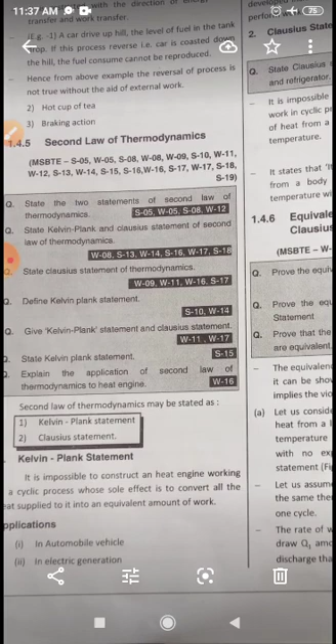Next we have seen the second law of thermodynamics, in which there were two statements: Kelvin Planck statement and Clausius statement. First let's see the Kelvin Planck statement. It is impossible to construct a heat engine. Planck statement is about heat engine and Clausius is about heat pump.

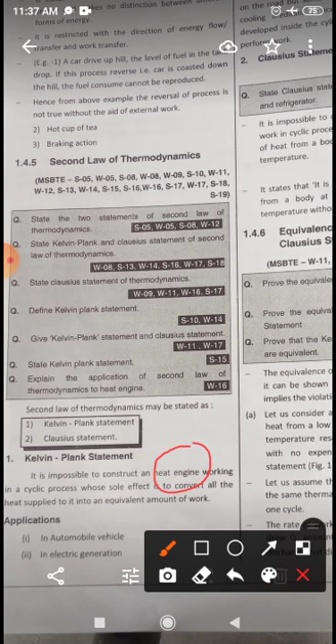Keep in mind, it is impossible to construct a heat engine working in a cyclic process whose sole effect is to convert all the heat supplied to it into an equivalent amount of work. There is no heat engine which converts all the heat supplied into work. That's why engines consume heat and produce power, but there are some losses. In the Kelvin Planck statement, there is no machine which can convert total heat supplied into total equivalent amount of work.

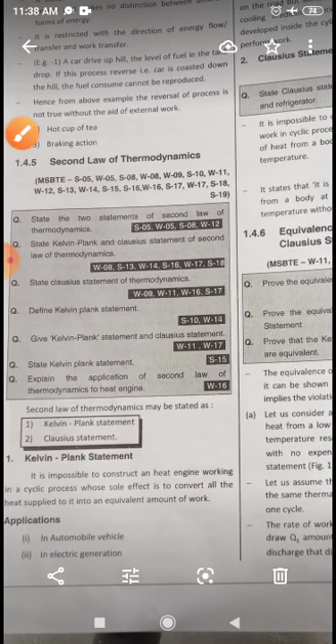Now the second statement is the Clausius statement about the second law of thermodynamics: it is impossible to construct a heat pump. A heat pump absorbs energy from a low energy reservoir to a higher energy reservoir. It is impossible to construct a heat pump which works in a cyclic process whose sole effect is to transfer heat from a body at lower temperature to a body at higher temperature without work.

Is it clear? A device to work in a cycle - you can clearly see that it is impossible for heat energy to flow from a body at lower temperature to higher temperature without the aid of external work. Without external work, we cannot take the temperature of a body from lower temperature to higher temperature.

Like a fridge: if we put water in the freezer, without supplying energy it cannot be frozen. We must turn the switch on so that the fridge will cool down that water to form ice. That means what the Clausius statement says is, without giving energy or work to the heat pump, it will not raise the temperature of any body.

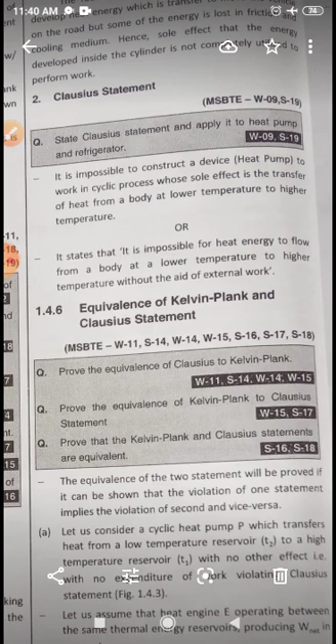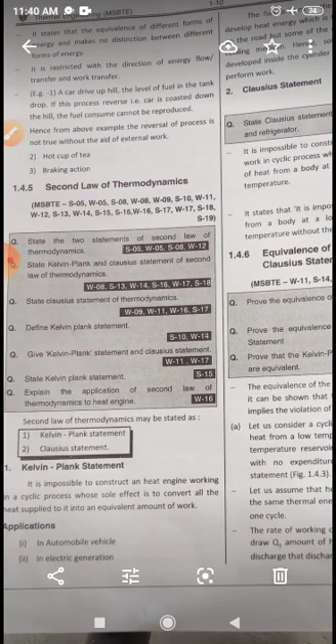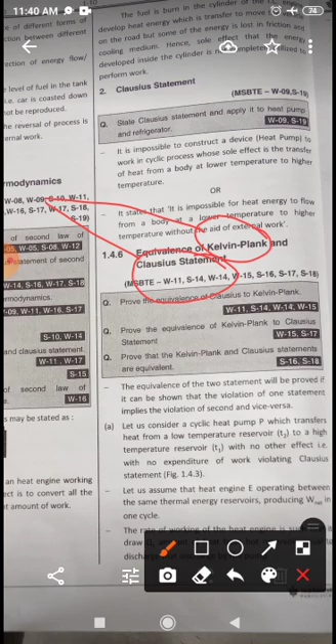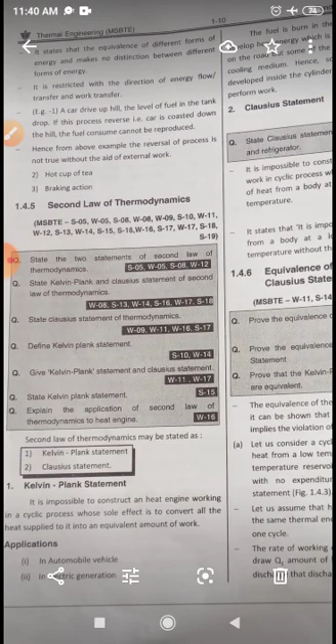Then, equivalence of Kelvin Planck statement and Clausius statement. We have to see this equivalence, how the Kelvin Planck statement and Clausius statement are both stating the second law of thermodynamics. That means Kelvin Planck and Clausius statements are both statements of the second law of thermodynamics - this we have to prove. Both are stating the second law, but in different ways, and how these two are equivalent we have to prove.

Now, for this, the equivalence of the two statements will be proved if it can be shown that violation of one statement implies violation of the second statement, and vice versa. That means if we violate the Kelvin Planck statement, the Clausius statement should also be violated, or vice versa - if we violate the Clausius statement, then the Kelvin Planck statement should also be violated.

That means, again I am telling you, if we are producing an engine, we have to violate the Kelvin Planck statement. That means we have to make one device which will convert the total heat energy absorbed to work. That means we are violating the Kelvin Planck statement. That means we are converting total heat input into total work output. As much heat as we have taken, we have totally converted into work. That means we have violated the second law, that is the Kelvin Planck statement.

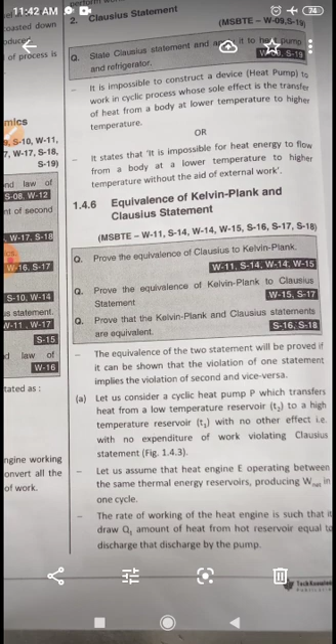Now by this process, it must happen that without supplying energy to the heat pump, it should take the heat from the lower reservoir to the higher reservoir. In this way, both statements will be violated. On the other hand, in the same way, we are going to see that.

Wait for a while. If we violate the Clausius statement, that means if we are taking the heat from the lower reservoir at low temperature to the higher temperature without supplying energy, this is violating the second law by the Clausius statement, and we supply it to a heat engine which converts the total heat supplied into total work. This is also violating the Kelvin Planck statement.

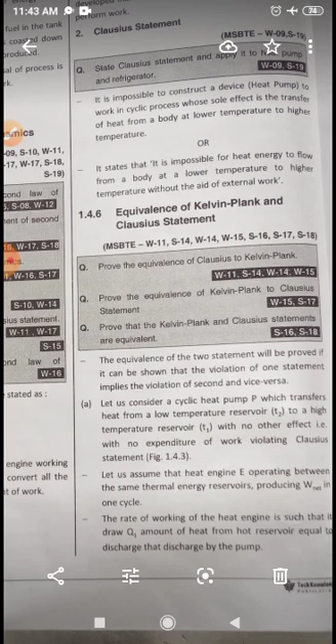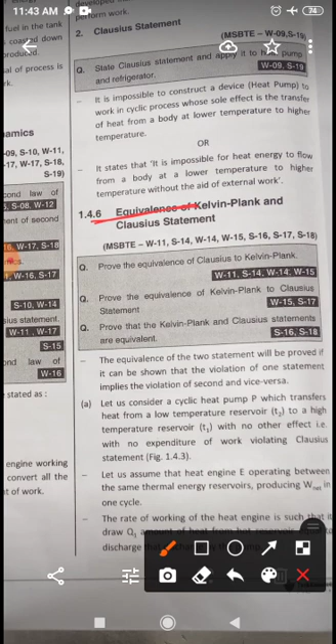That means we can prove the equivalence by violating one statement and proving that the other is also violated in the same way, or vice versa. Let's see that.

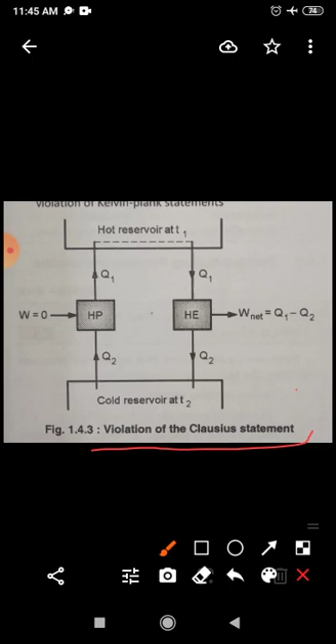Okay, this is the first machine, in which there is violation of the Clausius statement; we have to show the equivalence of Kelvin and Clausius. Okay, now this is the PMM2, that is perpetual motion machine 2, in which violation of the Clausius statement takes place. That means we have supplied the heat from the cold reservoir to the hot reservoir without supplying energy. That means this heat pump is violating the Clausius statement.

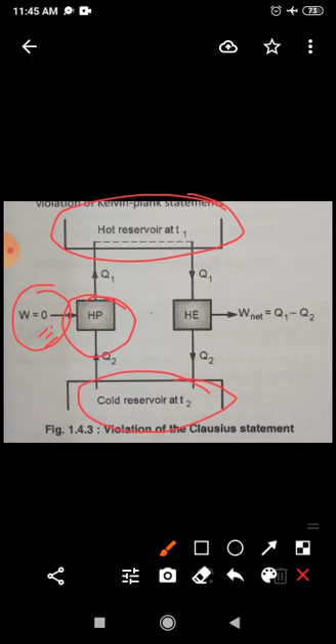Okay, understand? Let me tell you again that in this machine, this heat pump is pumping the heat from the cold reservoir to the hot reservoir without supplying energy. Energy is zero, or work done is zero. That means the Clausius statement is being violated. Okay, now let's see what happened in another machine. This is the heat engine.

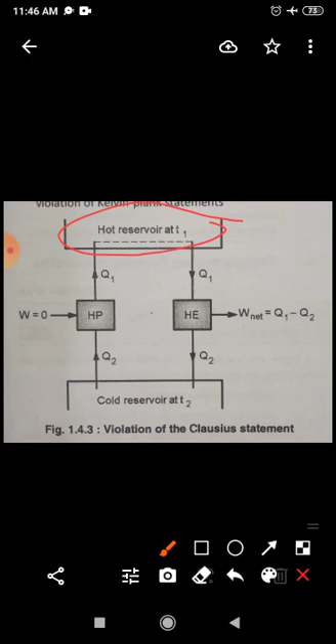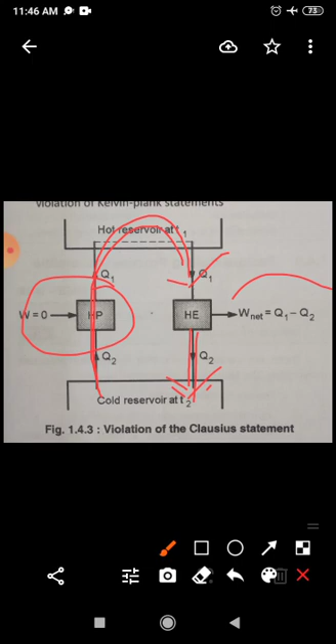Now remove this hot reservoir, because now directly consider that this Q1 is coming from this and supplied to the heat engine. In this cycle this heat engine is working. Now the heat engine is taking the energy from the cold reservoir, which is pumped by the heat pump, and supplying to the same reservoir while producing some energy, which is a violation of the Kelvin Planck statement.

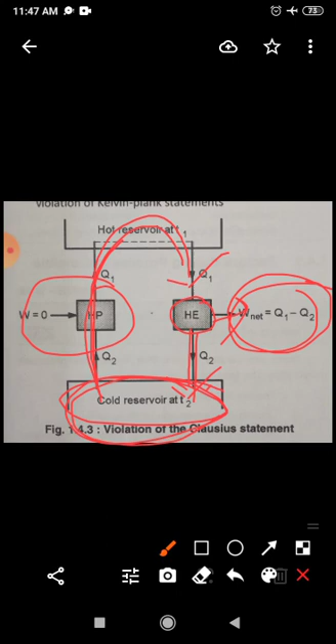Okay, we cannot manufacture such a machine which is working with the same reservoir and producing some energy. This is a violation of the Kelvin Planck statement. The heat engine is producing some energy by taking some heat from the same reservoir and supplying to the same reservoir. This is a violation of the Kelvin statement.

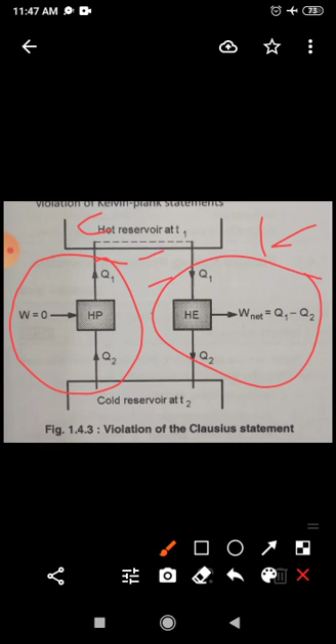Okay, therefore if the Clausius statement is violated, the Kelvin Planck statement is also violated. Therefore these two, the Clausius statement and the Kelvin Planck statement, both are statements of the second law of thermodynamics. Okay, now

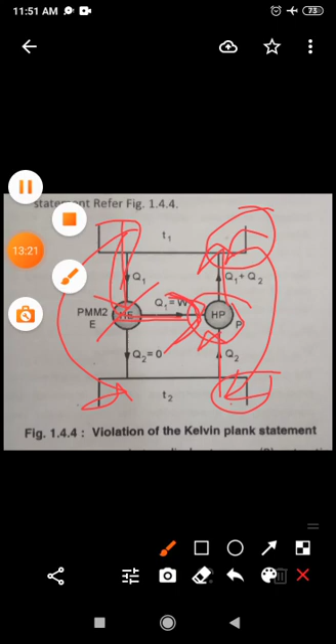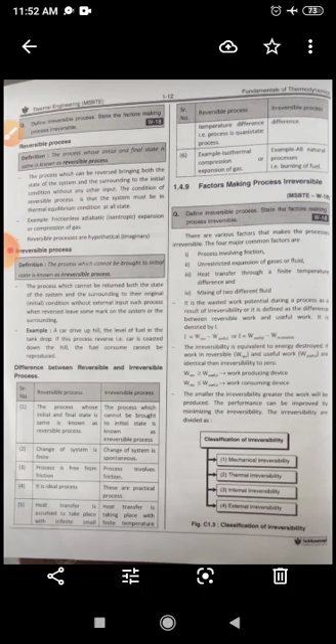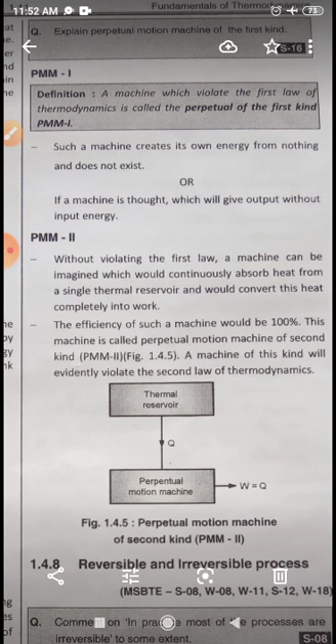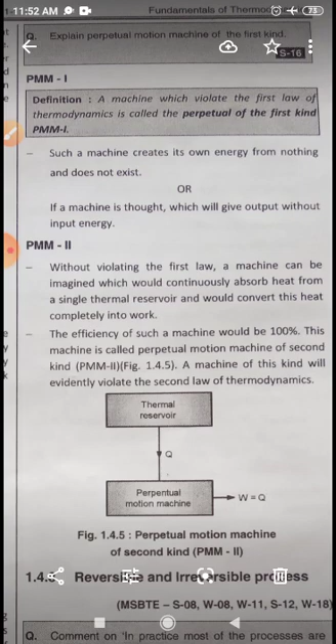Okay, in this way we have seen the equivalence between the two statements. Now let us study the perpetual motion machines 1 and 2, that is PMM1 and PMM2. You can see the definition: a machine which violates the first law of thermodynamics is called a perpetual motion machine of the first kind, that is PMM1. Such a machine creates its own energy from nothing and does not exist. If a machine is thought of which will give output without input energy, that is PMM1.

Now PMM2: without violating the first law, a machine can be imagined which would continuously absorb heat from a single thermal reservoir and would convert this heat completely into work. The efficiency of such a machine would be 100%. This machine is called a perpetual motion machine of the second kind.

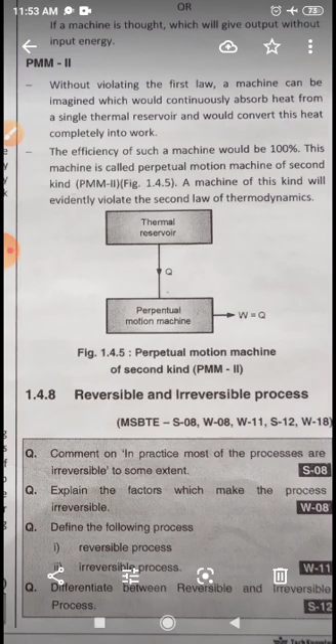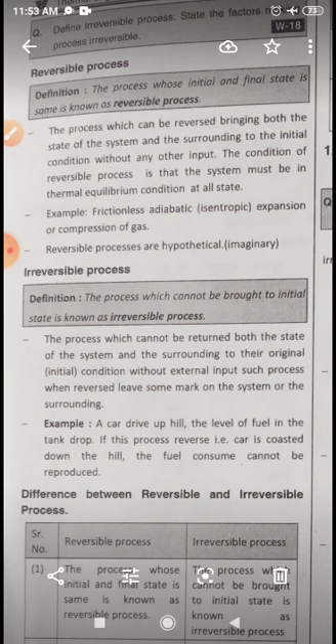A machine of this kind will evidently violate the second law of thermodynamics. Okay, now what is reversibility and irreversibility? Now what is a reversible process? The process whose initial and final state is the same is known as a reversible process.

The process which can be reversed, bringing both the state of the system and the surrounding to the initial condition without any other input. The condition of a reversible process is that the system must be in thermal equilibrium at all states. Example: frictionless adiabatic, that is isentropic, expansion or compression of gas. Reversible processes are hypothetical; no completely reversible process exists in the universe.

Now, irreversible process. The process which cannot be brought to its initial state is known as an irreversible process. The process which cannot return both the state of the system and the surrounding to their original condition without external input. Such processes, when reversed, leave some mark on the system or the surrounding.

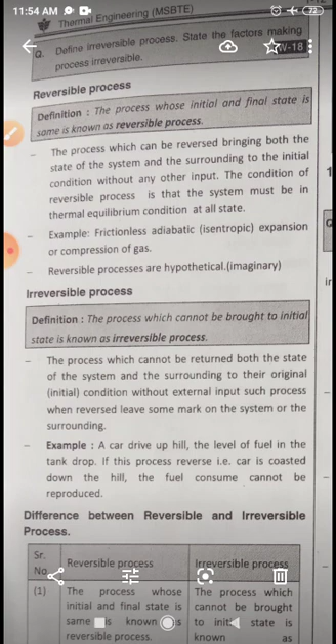An example is a car driven up a hill. The level of fuel in the tank drops. In the reverse process, the car is coasted down the hill. The fuel consumed cannot be reproduced. Okay. Now, difference between reversible and irreversible process.

Difference between reversible and irreversible process. The process whose initial and final state is the same is known as reversible. The process which cannot be brought to its initial state is irreversible. Change of system is finite; change of system is spontaneous. The process is free from friction; the irreversible process involves friction. It is an ideal process; these are practical processes.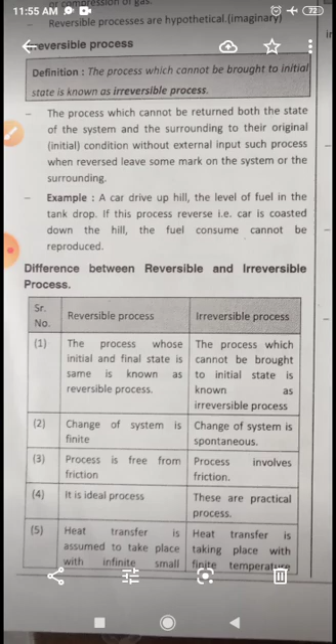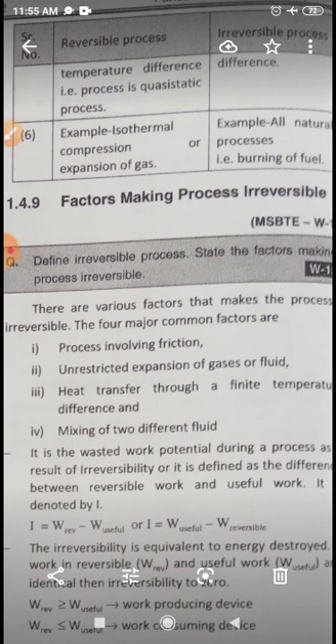Heat transfer is assumed to take place with an infinitely small temperature difference; in irreversible, heat transfer takes place with a finite temperature difference. That is, the process is a quasi-static process. We have seen what quasi-static means. Very slow processes are reversible processes. Example is isothermal compression or expansion of gas. Example of irreversible: all natural processes, that is burning of fuel.

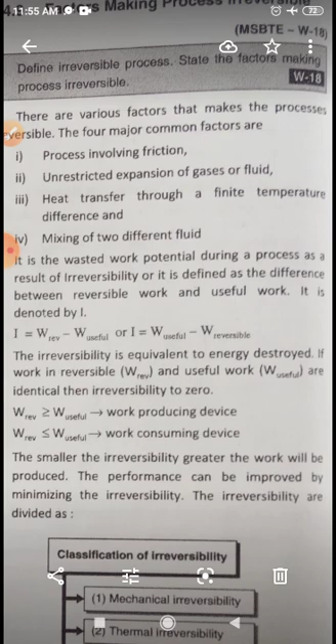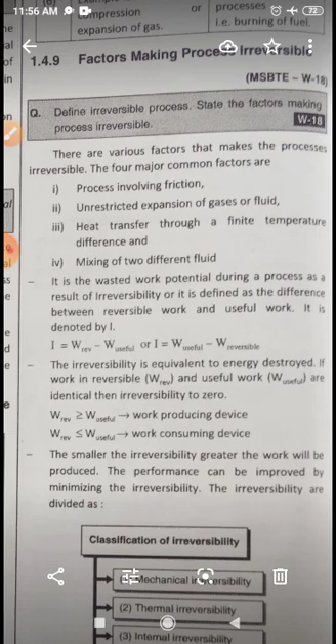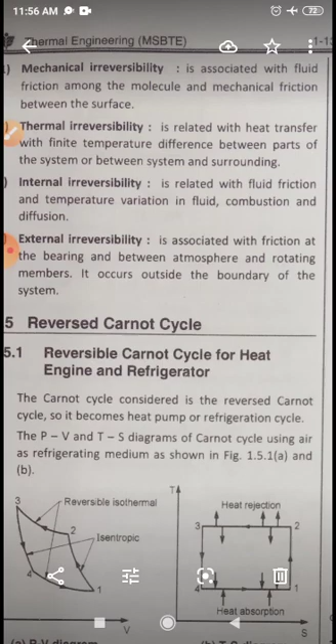Now, factors making the process irreversible are friction, unrestricted expansion of gases or fluid, heat transfer through a finite temperature difference, and mixing of two different fluids. These are the factors affecting reversibility. Then mechanical irreversibility is associated with fluid friction among the molecules and friction between surfaces. Thermal irreversibility is related to heat transfer with finite temperature difference between parts of the system or between system and surrounding.

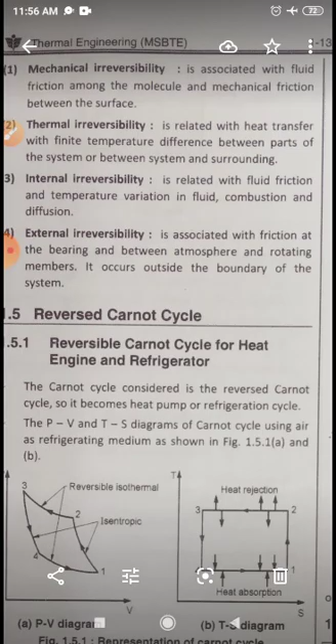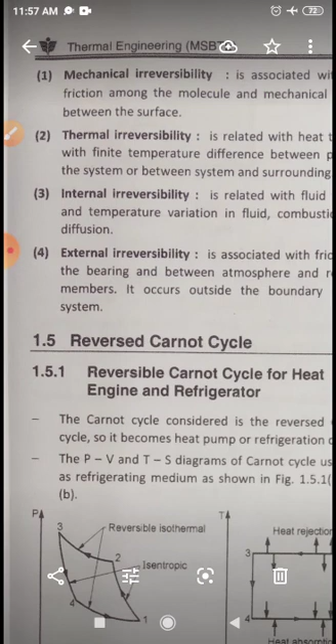Internal irreversibility is related to fluid friction and temperature variation in fluid, combustion and diffusion. External irreversibility is associated with friction at the bearing and between atmosphere and rotating member. It occurs outside the boundary of the system. Okay, these are the things we are studying now. In the next lecture, we are going to study the Carnot cycle and reverse Carnot cycle, which will be very necessary for us in IC engines also.

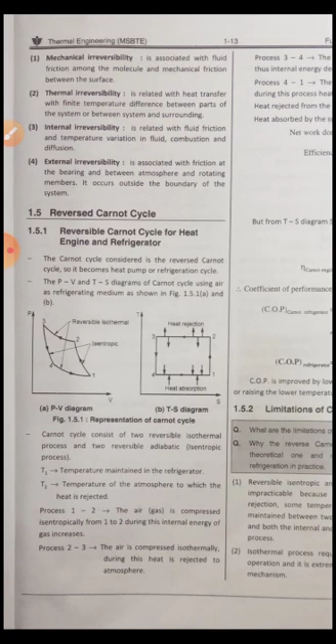Let's summarize what we have seen in this lecture: zeroth law, first law, second law, Clausius statement, Kelvin-Planck statement, how the Kelvin-Planck and Clausius statements are equivalent to each other, and also perpetual motion machine, that is PMM1, and perpetual motion machine of the second kind, then reversibility and irreversibility.

Let me revise one more thing: what is a perpetual motion machine? A machine that violates the first law of thermodynamics, that is, the machine creates its own energy from nothing, and does not exist. The first law states energy can neither be created nor destroyed, but it can be converted from one form to another. But in this machine, without taking energy, we are producing energy. That's why this is perpetual motion machine 1.

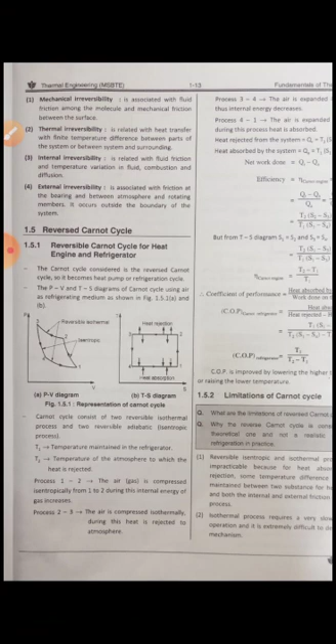And the second machine violates the second law, that is, it is continuously absorbing heat from a single thermal reservoir and converting it. In this perpetual motion machine, it absorbs heat from the same reservoir and produces energy. That means it is 100% efficient. So this kind of machine cannot be produced. So this is a perpetual motion machine of the second kind.